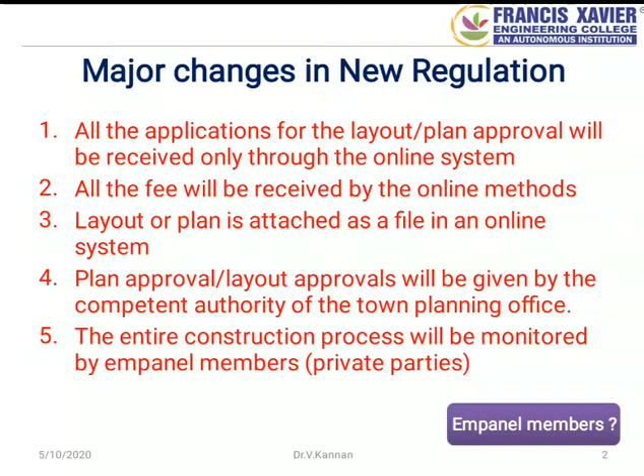This is the general structure for the layout or plan approval process. The district-wise competent authority is appointed by the Principal Secretary for Housing and Urban Development, Chennai. The Principal Secretary only frames the rules and regulations, and they will be executed by the district-wise competent authority. I already told you the competent authority means the director of the town planning office, which is situated in every district headquarters.

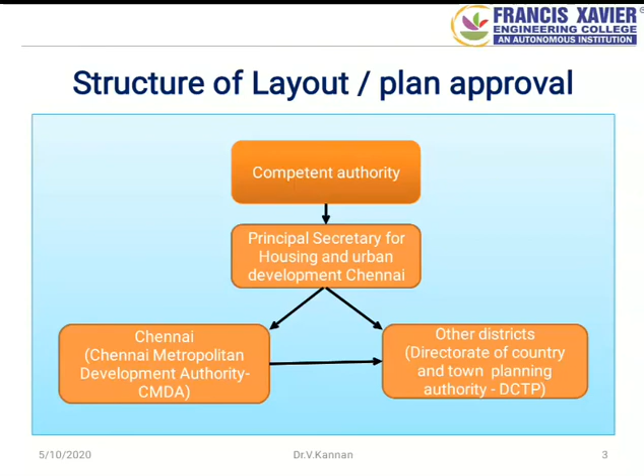Now I will explain who the empanel member is and their roles and responsibilities. The empanel member is a professional, that is a qualified BE or ME candidate in civil engineering, appointed by the competent authorities. They monitor the construction activities according to the Tamil Nadu Combined Development and Building Rules 2019 in every stage of construction. There are 4 categories listed here: first, registered architect; second, registered engineer; third, structural engineer; and fourth, construction engineer.

The qualification for each empanel member is also mentioned here. For registered architect, you have to complete Bachelor of Architecture. For registered engineer, you have to complete BE in Civil Engineering. For registered structural engineer, you have to complete Master of Engineering in Structural Engineering specifically. For construction engineer, you have to complete BE Civil Engineering. If you have a BE or ME degree in Civil Engineering, you are eligible to become an empanel member. A formal interview will be conducted by the competent authority. If you fit, you will be appointed as an empanel member for a period of 5 years. Then you can renew.

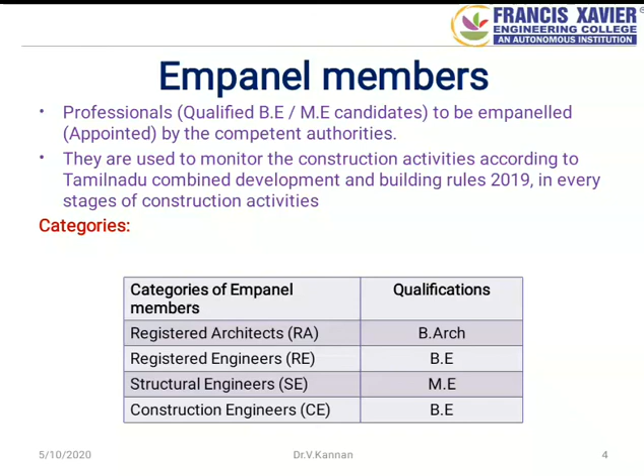So, in this slide, the main roles and responsibilities of the empanel member are presented. The first responsibility is they shall study the local act, rules and regulations and standing orders approved by the competent authority. That means you have to know the current rules and regulations for the construction process.

Next role is they shall prepare and submit all plans in a neat, clean and legible manner. So your plan must be errorless. Next, they shall submit plans, documents and details without any scratches or corrections. Also, site conditions shall be correctly shown.

Next one is the registered architect or registered engineer and the structural engineer shall be responsible for adhering to the Indian standard specifications. So, you have to know the specifications of the Indian standard codes for the construction process.

Next responsibility is in the event of any deviation, the registered architect or engineer is solely responsible to bring it to the notice of the competent authority. It means if there is any error, you have to inform the competent authority immediately. Okay.

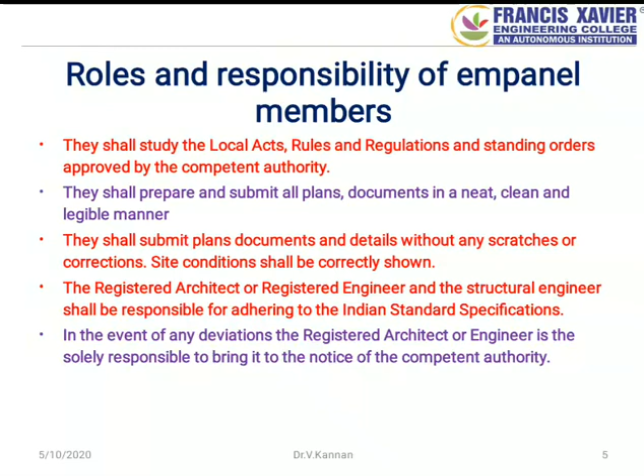So now I move on to the type of location and building. According to the new regulation, the location of the plot is classified into 3 types. First one is continuous building area, second one is economically weaker section area, third one is other area. Continuous building area means a building constructed without any side setback, including row type of housing. It means between 2 houses there will not be any gap. So it will be constructed by the common wall system. That is called continuous building area.

Next one is economically weaker section area. It means this area is declared as a slum by the Tamil Nadu Slum Clearance Board or categorized as EWS, that is economically weaker section area. All other areas may be called other areas.

Next, the type of building. According to the new regulation, the building is categorized into 2 types. One is non-high-rise building, another one is high-rise building. If the height of the building is less than 18.3 meter, that kind of building is called a non-high-rise building. If the height of the building exceeds 18.3 meter, that kind of building is called a high-rise building.

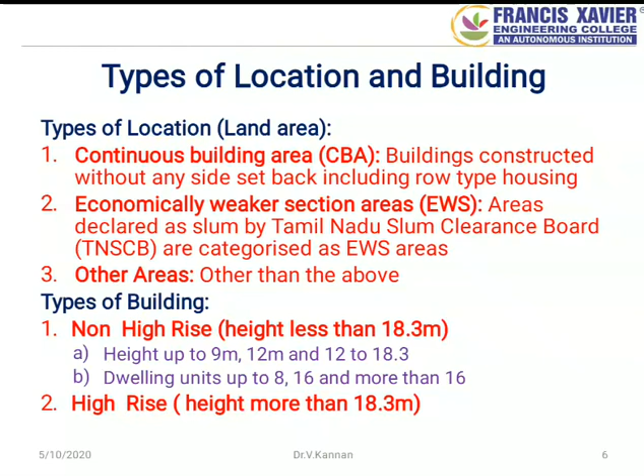Now, the important part I am going to tell you: planning parameters. There are 11 parameters for the construction of non-high-rise buildings up to 9 meter height. They are minimum plot extent, minimum plot width and frontage, third one is minimum road width, fourth one is maximum height of the building or dwelling units, maximum floor space index, maximum plot coverage, seventh one is the front setback, next, side setback, rear setback, and open space reservation and passage.

If your building height exceeds 9 meter, different guidelines are given and that should be followed. In today's presentation, I am going to explain the current rules and regulations for buildings having a height of 9 meter. So before preparing a building plan for approval, you must know these parameters. Then only your plan will be approved without any delay. If your plan does not conform in any one of the parameters, your plan will be rejected. Okay, I will explain one by one.

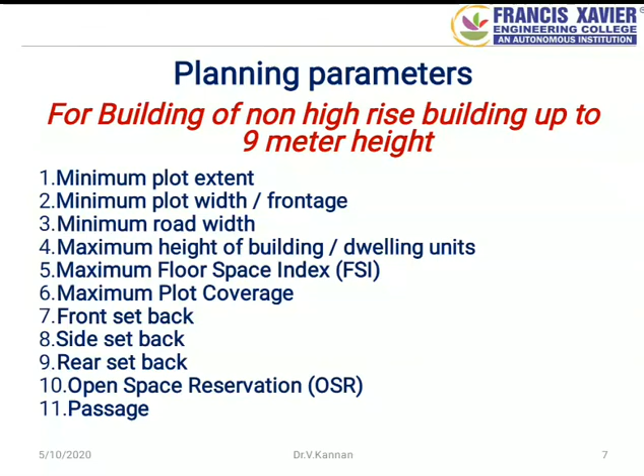The first parameter is minimum plot extent. Extent means area. So as per the new regulation, if your area is in Natham or a declared economically weaker section area, the plot area must be higher than 80 square meter. In other areas, the plot area must be higher than 220 square meter.

For easy understanding, I am showing a recently approved layout. From that layout, I am taking plot number 19. Just look at plot number 19. The area is 306 square meter. According to the new regulation, your plot area must be higher than 220 square meter. So we can purchase this kind of plot for construction purposes.

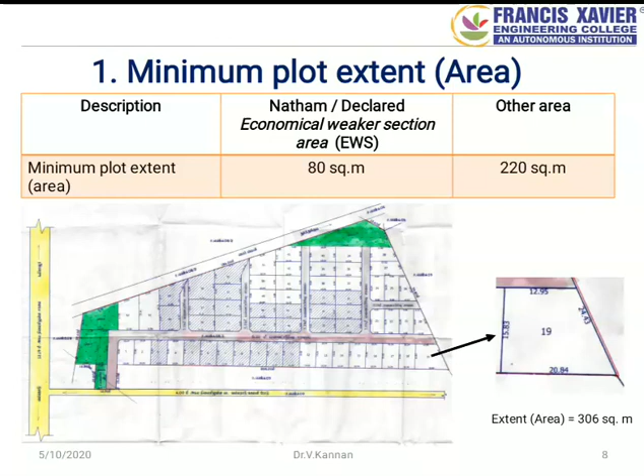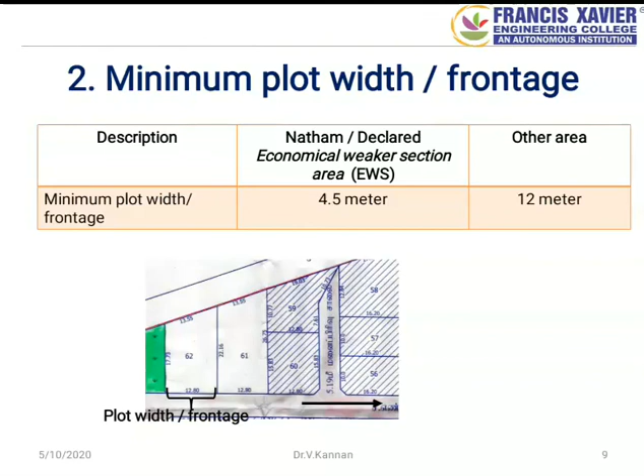Next parameter is minimum road width. You know the road width is the cross-sectional width of the road. So as per the new regulation, for continuous building area, your road width must be higher than 3 meter. For economically weaker areas also, the width of the road must be higher than 3 meter. For other areas, road width greater than 3 meter to 6 meter is one category. Above 6 meter is another category in the other area layout.

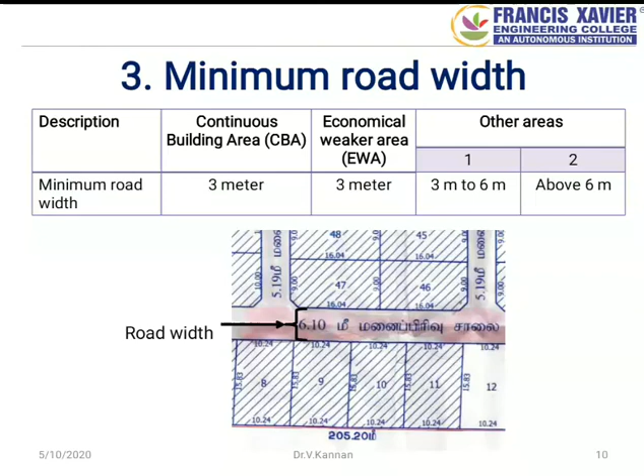The next parameter is maximum height of the building or dwelling units. Maximum height for continuous and economically weaker areas is 12 meter. So your building height may be up to 12 meter. Otherwise the plan will not be approved.

For other areas, in the first category, that is 3 meter to 6 meter category, the maximum height of the building will be 9 meter height. For second category, that is above 6 meter road width, your building height may be extended to 12 meter height.

Okay. So next, the maximum number of dwelling units or commercial use. First of all, you have to know what is meant by dwelling units. Dwelling means a house, group of houses in a single building, that is apartment. So for continuous building area or economically weaker area, the dwelling units may be 16. For other areas, in category number 1, up to 8 dwelling units may be there. In second category, in other areas, up to 16 dwelling units may be permitted.

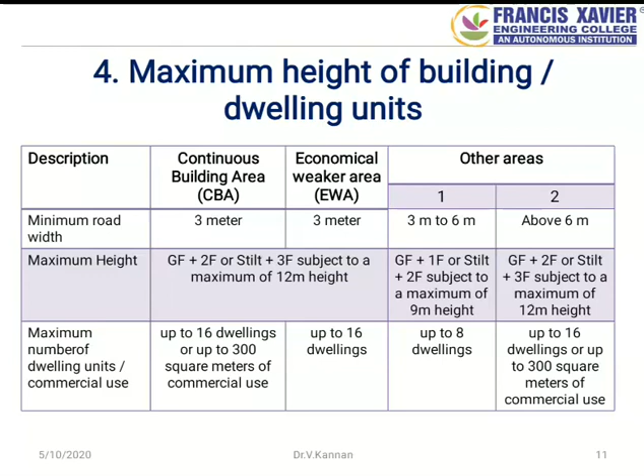Okay. So the next parameter is maximum floor space index. It can be calculated by the simple formula, that is a ratio between total covered area on all floors to the area of the plot. According to new regulation, it must be less than 2. So for example, I am showing a simple figure. You just look on that figure. The outer boundary is called plot area. The inner one is building area.

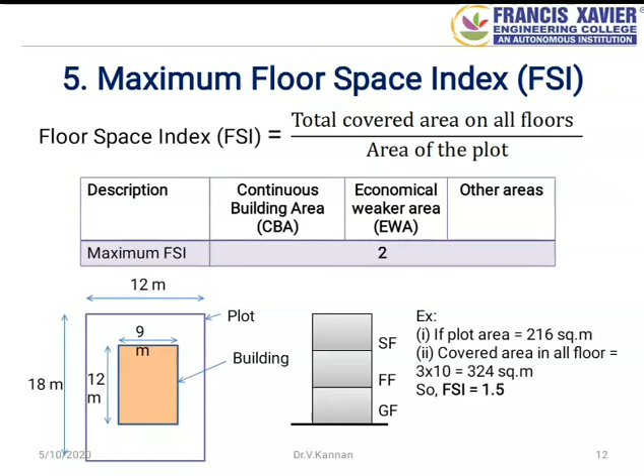For example, your building having 3 floors, that is the ground floor, first floor and second floor. First you have to calculate the area for the plot, that is 216 square meter. Next you calculate area for the single floor, that is 9 meter into 12 meter, and multiply with 3. 3 means 3 floors. You will get 324 square meter. Then you can easily calculate the floor space index. For this case, floor space index is 1.5. That is below the new regulation value, that is 2. So we can use this kind of building and we can submit the document or application for the plan approval.

Next parameter is maximum plot coverage. It can also be calculated by a simple formula, that is ratio of maximum built-up area at any floor divided by the plot area into 100. It will be in percentage. Okay. For continuous building area and economically weaker area, it must be less than 50%. For other areas, it must be less than 40%.

Okay. So again I am showing a simple example. From that simple example, we can calculate the maximum plot coverage. According to this example, your plot coverage is 50%. So you can build a house in continuous building area or economically weaker area, but not for other area. You have to know. Otherwise you have to change the dimension of the building. Then only your plan will be approved.

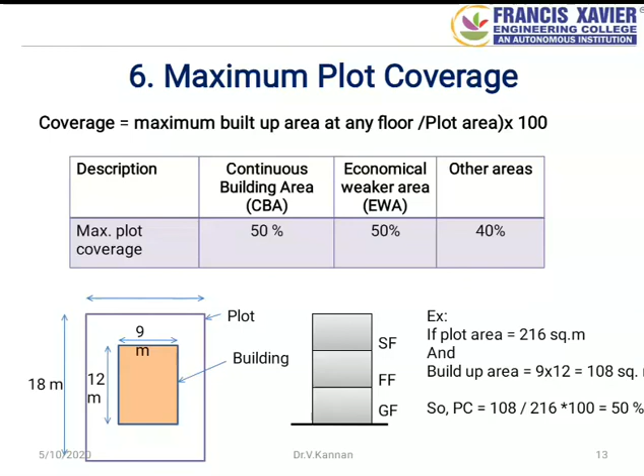The next parameter is setbacks. Setbacks means the empty land distance between road and the building. Okay, that is called front setback. The empty space between boundary and the side of the building is called side setback. The empty land between back side of the margin and the building is called rear setback.

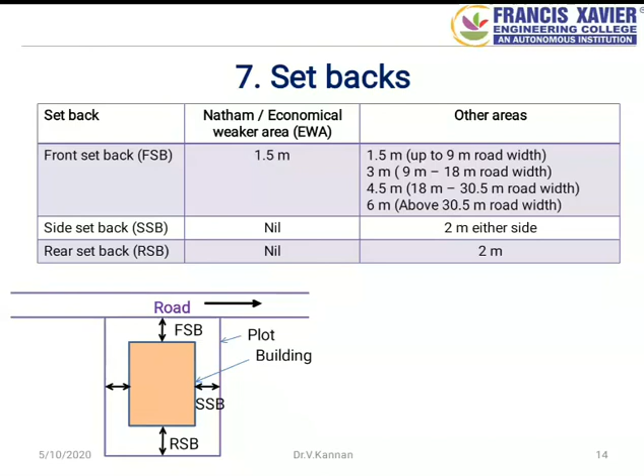So for Natham or economically weaker area, minimum 1.5 meter should be given as a front setback. For others, it must be 1.5 meter up to 9 meter road width, 3 meter for 9 meter to 18 meter road width, 4.5 meter for 18 meter to 30.5 meter road width and 6 meter for above 30.5 meter road width. And side setback and rear setback is nil for Natham and economically weaker area. For other areas, it must be higher than 2 meter. Okay, this is setback. This setback must be left for the newly constructed building. Then only your plan will be approved.

Next parameter is open space reservation. To allot the open space reservation, excluding the space for road allocated within the layout, OSR is given for the public park; usually about 10% of the total area of the layout must be left. Okay, you have to check before purchasing the plot.

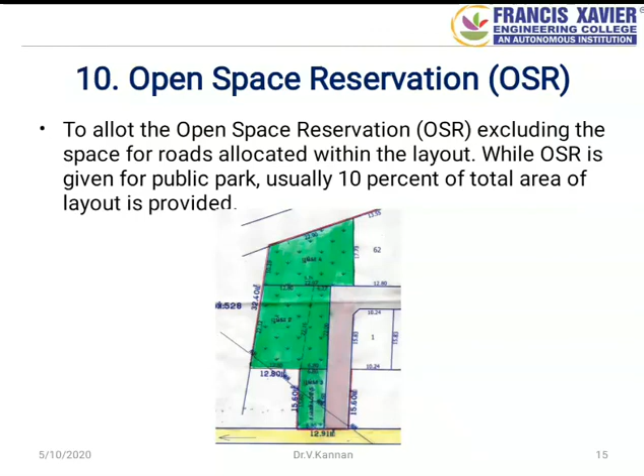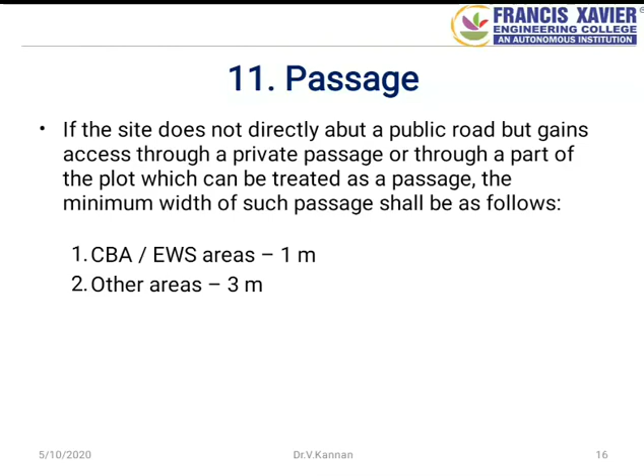Next important parameter is passage. If the site does not directly abut a public road but gains access through a private passage or through a part of the plot which can be treated as a passage, the minimum width of such passage should be as follows. For continuous building area or economically weaker section area, it must be greater than 1 meter. For other areas, it must be higher than 3 meters.

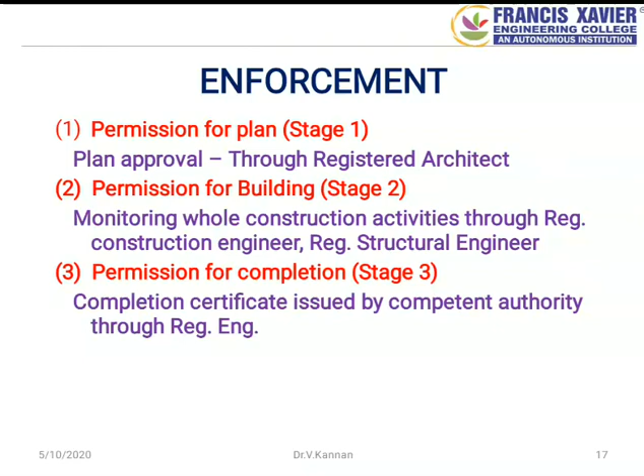So these are all the enforcements as per new regulation. First you have to get the permission for the plan. Next you have to get the permission for building. Next you have to get the permission for completion. So these are the 3 important processes or stages of building construction now set by the Tamil Nadu government as per new regulation. Okay.